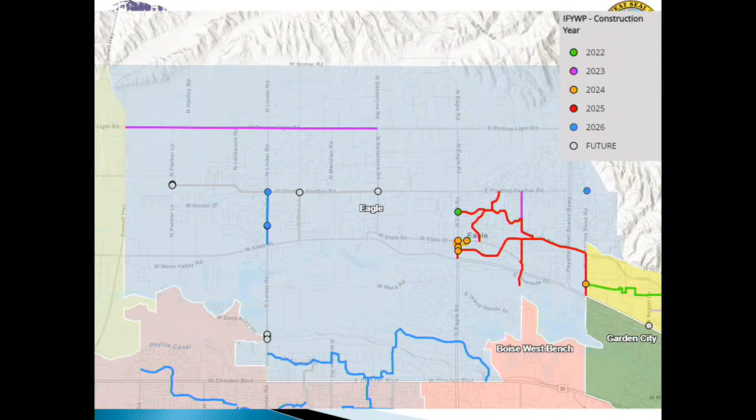Next slide, please. So what are we doing about it? I wanted to share with you the most recent integrated 5-year work plan projects that are in Eagle. If you'd like a copy of this, we're more than happy to provide that to you and your staff. Next slide, please. So just going across the board, these are some of the projects that we are doing with the current timelines across the board for your review. Your staff has this, they've been integral in putting this together. Next slide, please.

Okay Stacy, next. So finally, what does this all mean? Well, from an ACHD perspective, Ada County across the board, if you look at where we were in 2020 and what the projection is for 2040, you can see it's a challenge.

It really is. And at the end of the day, there is no silver bullet on how we address this, how the commission addresses it in collaboration with you and the other cities and all the other elected officials. It is a three-pronged approach: one, building out the base CIP network. However, we're also ensuring we're focusing on alternate modes and travel demand management going into the future. You can't have one without the other, going to work and such.

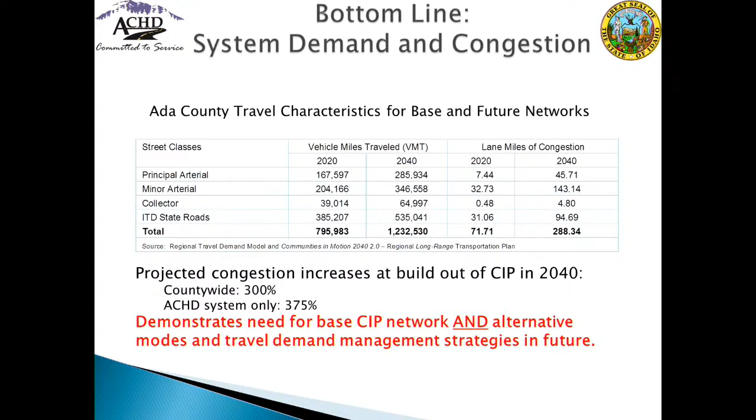So with that being said, next slide please. That's just a quick introduction of what we're seeing. And with that, I'd like to turn it over to our team to get a little bit more specific on the projects and categories that you've asked us to discuss.

Commissioner May, any thoughts on that? No, we'll just go ahead and move forward. Again, please stop us if you need any clarification or have any questions as we move forward. So thank you, Director Wong.

Welcome, Diane. Thank you.

Mr. Mayor, Madam President, Commissioners, and Council members, my name is Diane Bevins. I'm the manager of capital projects, so we're just waiting for the presentation to come up here.

Rachel Spears is on Zoom. She couldn't be with us in person today, so I'm happy to give the presentation for her, and she's also available in case you have questions that I'm not able to answer.

So the first update is Eagle and State. This is an exhibit of the project area here. The Aikens project, in addition to the quadrant for Eagle and State, the Olde Park extension, the new Palmetto Avenue extension, as well as the recent improvements at State Highway 44.

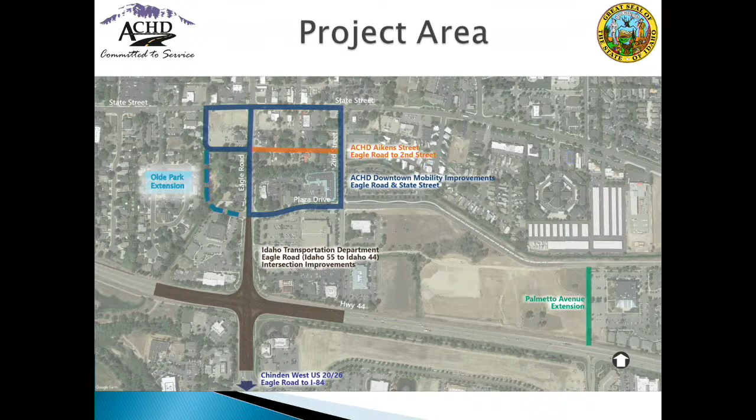So a little background on where we are, the project timeline. Last year, we put 99% design on hold, and at our previous joint meeting, we decided to do an update to the traffic analysis and put the design on hold.

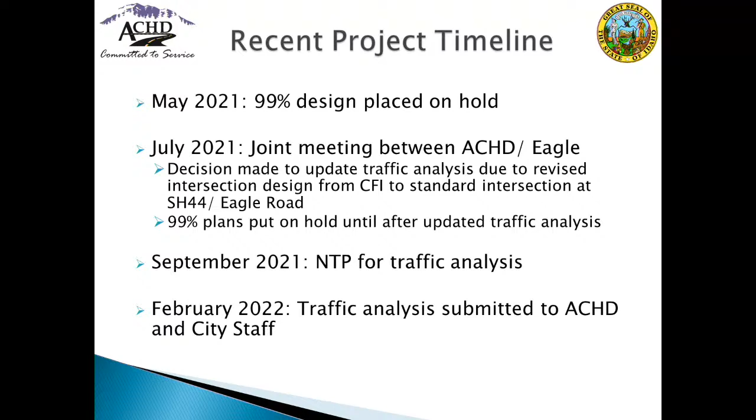We had the NTP for traffic analysis in September, and just last month we did receive a draft copy of the traffic analysis. I'll go over the key findings.

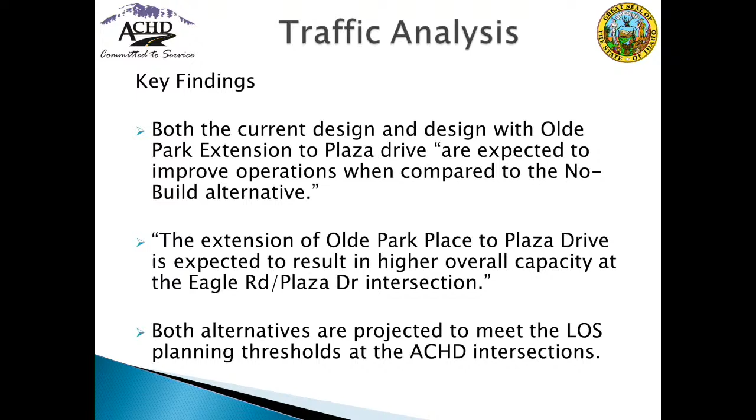With the extension of Olde Park or Aikens on the west side of Eagle Road, all the intersections showed an acceptable level of service. So there wasn't much difference in the traffic analysis there, which is good news.

So moving forward, the city will be in the lead on the Olde Park Place extension from Aikens Street, working out those right-of-way negotiations. We are going ahead and moving forward with 99% design. That will include not having a second southbound lane on Eagle Road, as the city requested.

Mr. Mayor and President, this was discussed with you on Monday with Justin, Director Wong. That will not require the widening of that bridge along the property that was just purchased by the city.

Again, we'll move forward in full coordination with the city and city staff, and we are continuing to explore construction phasing, which was also requested last year at the joint meeting, in full coordination and support with downtown Eagle businesses and residents, so we can figure out what we can do there.

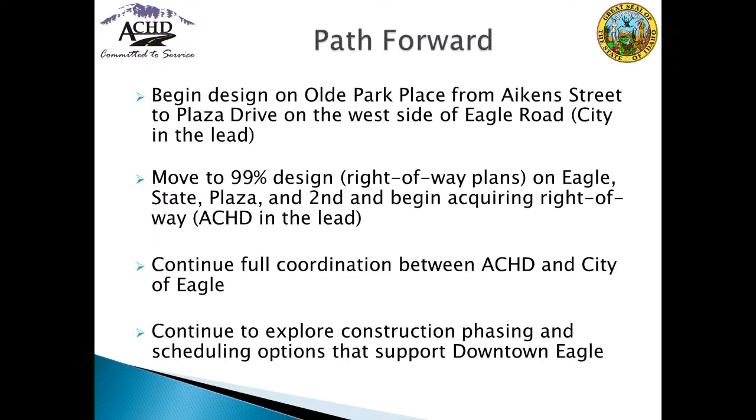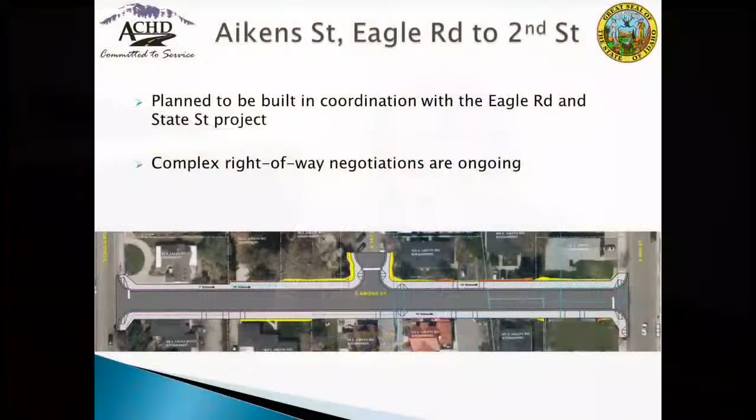I wanted to give a quick update on Aikens as well. We are currently in right-of-way negotiations on that project. It's going to be constructed in coordination with Eagle and State. We just wanted to highlight that there are some very complex and complicated right-of-way negotiations at this time. We are moving through those, and I will stand for any questions you have on Eagle and State or Aikens.

Thank you very much, Diane. Mayor Pierce, or any members of the council, any questions on the projects referenced? No? All right, good job. Thank you very much, Diane.

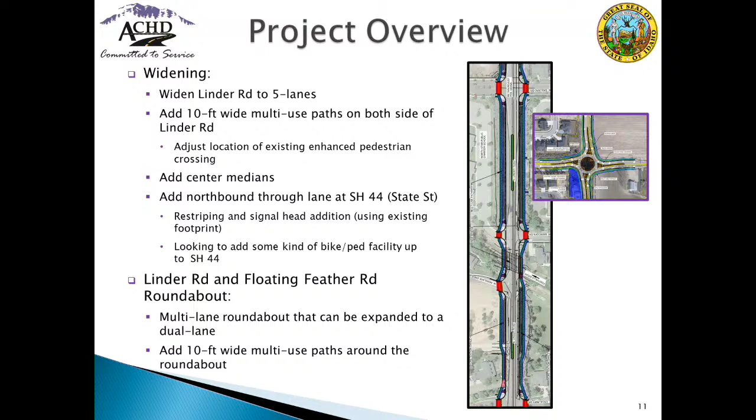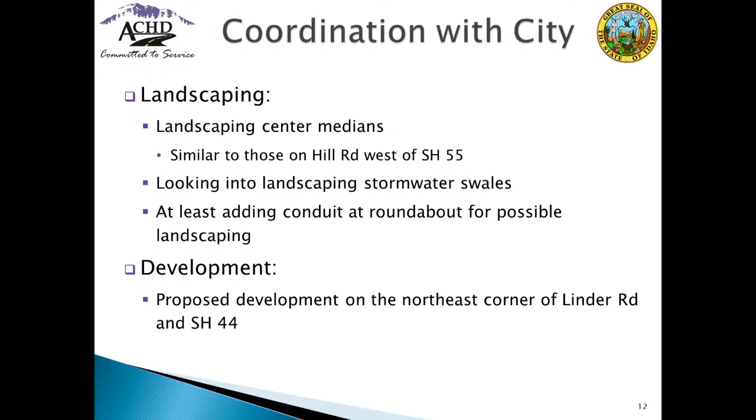Proposed timeline: public hearing number 2 is scheduled for July. Right-of-way starts 2023, and construction is currently scheduled for 2026. But with right-of-way in 2023, there is the opportunity to construct earlier if funds, staff, and all that is available. I'll stand for any questions.

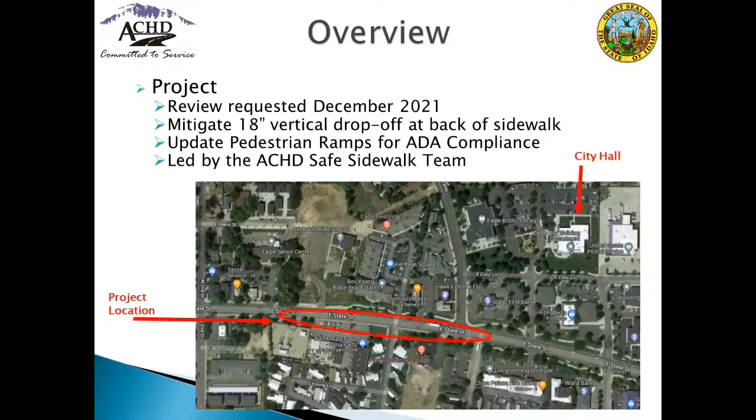It just looks like a brand new sidewalk, or at least the parking lot looks new too. I don't believe it's brand new. It's been there for years, been there for a long time. I'd confidently say at least pre-1990s, when ADA requirements came in. That was our best guess from 2 people that have lived there for a really long time. So thank you, Tom.

And Madam President, Mr. Mayor, members of the council, I'll go right into our next presentation, which is an update for crossing efforts.

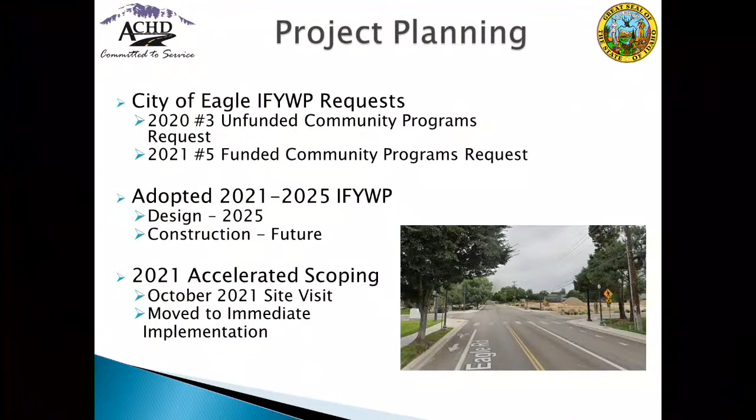What happened in fall of last year is we undertook accelerated projects, about 16 in total, including this intersection. During an October meeting between the City of Eagle and ACHD, this project looked like it was moving forward, then being proposed with the '21-25 integrated 5-year work plan. So the recommendation was to move this for immediate implementation.

So our design team started designing this intersection pedestrian hybrid beacon, and found out it wasn't as simple as just adding arms to the existing poles. It really comes down to federal requirements with ADA compliance. What was determined was that to meet ADA compliance for all of those, due to the slope, total reconstruction of that intersection is going to be required to really level it out and make the required slope.

In addition to that, right-of-way is going to be needed for that northwest corner to allow for the landing pad as ADA users are coming through. Originally we felt that we could do this corner by corner, but it requires total reconstruction.

We also really need to pay close attention to the traffic control and bicycle and pedestrian detours, and really the purpose of this is with how vital of a corridor Eagle Road is. This would entail doing half of the other intersection, or the other side of the intersection.

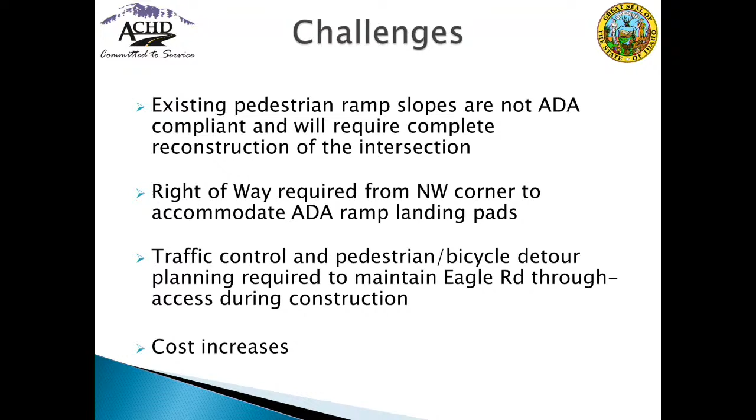Cost increases. But with that, ACHD committed to making sure this project is complete this year. We've pulled several team members, both our traffic team and our design team, to focus solely on making sure we can get the design phase done as quickly as possible and move on to those next steps. We're receiving the 75% designs, and the goal is to have those final by April.

With that, we are still planning to have this constructed in late summer. However, one thing I wanted to highlight is that it impacts the school, so we need to be closely coordinating with West Ada, especially given how close it is to the elementary. And with that, that concludes my presentation. Happy to stand for any questions.

Well, thank you, Tom. Anxious to see that project go forward, but sometimes you think it's going to be a lot quicker and easier at the outset, and then you start digging into it. So good work by our team. Thank you very much.

Any questions or comments? President May? Commissioner Hanson. Yeah, thanks, Tom. I recognize that with 8 different ramps from 4 different corners, that adds a lot of complexity. Is there a reason why a raised crosswalk was eliminated as an option for this intersection? It seems to me that would have been a much simpler, although perhaps a little more expensive, but a much simpler and cost-effective method. It would also have provided some traffic calming near the school.

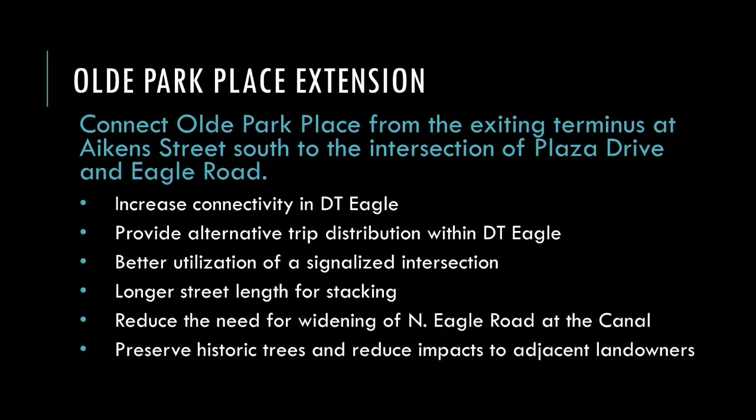At that time, we agreed that we would give ourselves a year to come back to ACHD with a design, and I want to give you a status of where we're at. This was the alternative we talked about, which was looking at potentially vacating the Aikens Street right-of-way between Eagle Road and Olde Park Place, and then putting in a new connection or road that connected Olde Park Place to the Plaza Drive signal.

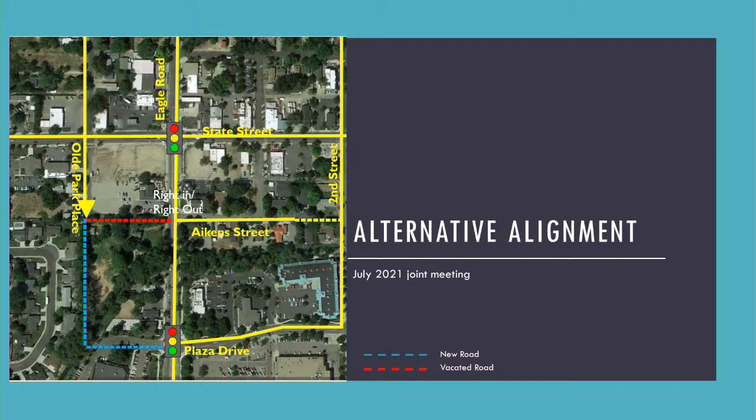So, work completed to date: we had preliminary meetings with Walgreens. The city purchased two properties associated with this, the Orville Jackson home, the historic home at the corner of Aikens and Eagle Road, and the parcel behind it at the intersection of Aikens and Olde Park Place today, where the existing termini is. The city engaged the city engineer, HECO, to do design work for Olde Park Place.

In 2022, we began bi-monthly meetings with your staff. We've had increased coordination and discussion with your staff in general, which has been huge. We've had a couple challenges.

We did have some data sharing issues. The 99% design you spoke of earlier was only provided to the city in PDF format, which means we have limited accuracy on these. I'd like to encourage the fact that we need CAD files to really take this design to building and engineering standards. So what I'm going to show you today is the best we got. We're still hoping to refine this a little further as we move forward.

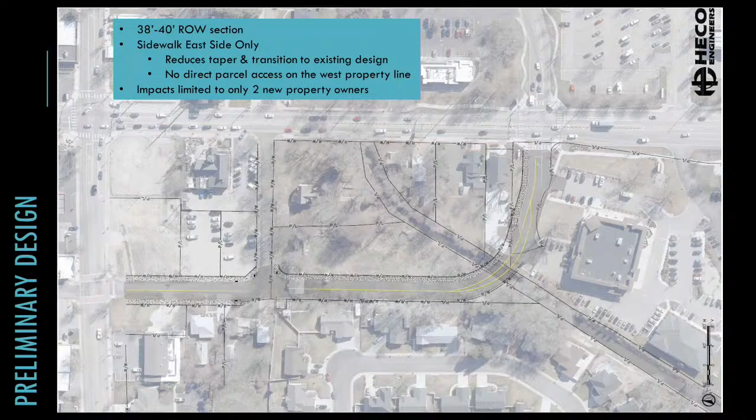At this point, this design's additional impacts are limited to only two property owners, due to the city's existing purchases of property. We've been able to narrow it down to that, and I can go through that in a little more detail. So, property impacts - you have these maps in front of you. I provided you both the layout of the road and this property impact.

The preliminary design requires the purchase of 0.43 acres of property aside from what the city already owns today. The property owners at the northeast corner of Aikens and Olde Park see a decrease in right-of-way need at only 1,429 square feet. The reason is that the design currently in front of ACHD has a very curved intersection here, and what we're able to do is, by creating a T intersection, reduce the amount of right-of-way necessary for that curve.

The property owner at the northwest corner of Aikens and Olde Park is estimated to have 645 square feet of impact, and most of that has to do with the taper that has to be done. This intersection, as currently designed by ACHD, takes most of its right-of-way from the western portion of the Olde Park Place existing right-of-way, which creates a jog in the road. As we talk further, we can discuss how, if that right-of-way was shifted to the east, we would be able to reduce the amount of right-of-way or that jog on that property at that corner.

Design at Plaza Drive requires the purchase of the Walgreens access parcel plus an additional 1,700 square feet. Walgreens owns an access parcel that is their road providing connectivity into the site, shown in blue. This assumes purchase of that entire parcel plus additional 1,700 square feet, and finally we require purchase of 1,337 square feet from Downs Auction House.

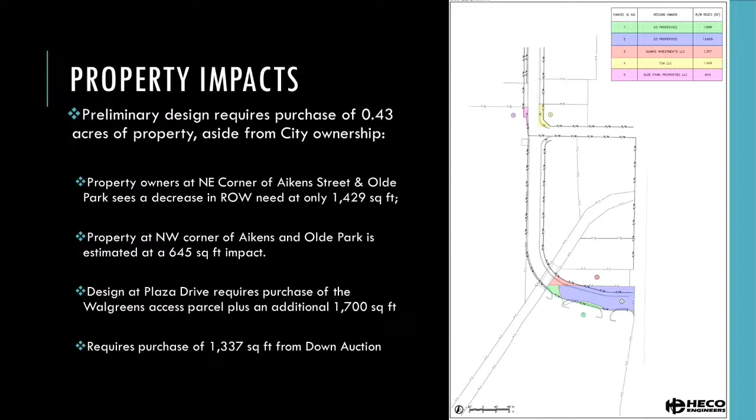This provides the curve necessary, but there is also a drive aisle connection that provides cross access to the parcels, allowing us to not require parking on Eagle Road or at the frontage of Eagle Road. This purchase allows us to get that additional right of way to keep that drive aisle and get cross connectivity in this area.

There are some assumptions and clarifications we need as we go forward. What we need to be working on is the Walgreens site. We have drive aisle locations right here and right here, which are existing drive aisles for the development. We need some support from ACHD to evaluate access, spacing, and alignments, similarly with that drive aisle right here, to make sure we're not creating additional issues due to location of drive aisles.

We have a dumpster relocation that's ours—we're not asking you guys to help with it. We just need to work with Walgreens on where they would like that to be located, because it currently is right about here.

We will be doing some work with Walgreens about the stacking of their drive-through. We estimate about 8 car lengths of stacking from the entry point into the drive-through, and whether they feel that's sufficient or if we need additional drive aisle length for them. We'll talk to them about what that means for their site.

Vacation of Aikens Street was discussed earlier and last year—looking at vacating this section of Aikens and granting it to the adjacent landowners in exchange for the right-of-way relocating to the east side of Olde Park Place on the northern section, essentially shifting land ownership. The parcels here, here, and here are owned by the same landowner, so we feel this is an encouraging place to look at realignment of right-of-way versus purchasing right-of-way.

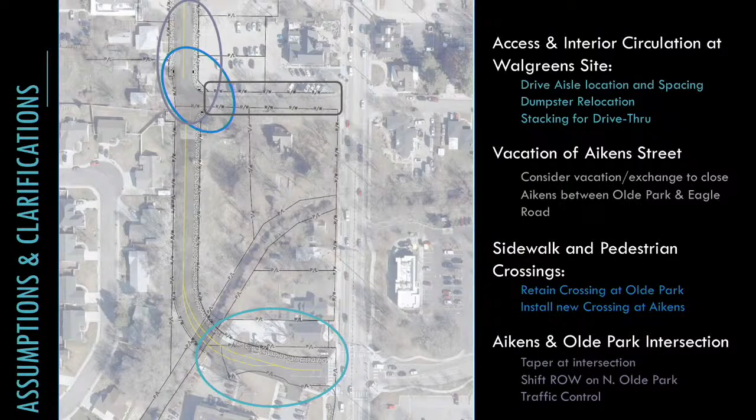Our next steps: we will review the preliminary plans and provide clarification on design assumptions from ACHD. We are meeting with the property owners to let them know we've had those preliminary meetings, and we'll have a secondary round of meetings to present the concept design and ask if it works or if there are concerns, and how we move forward together. We need to get the CAD data necessary to accurately design the project, then move into engineering and construction design with a goal of completion by August of 2022.